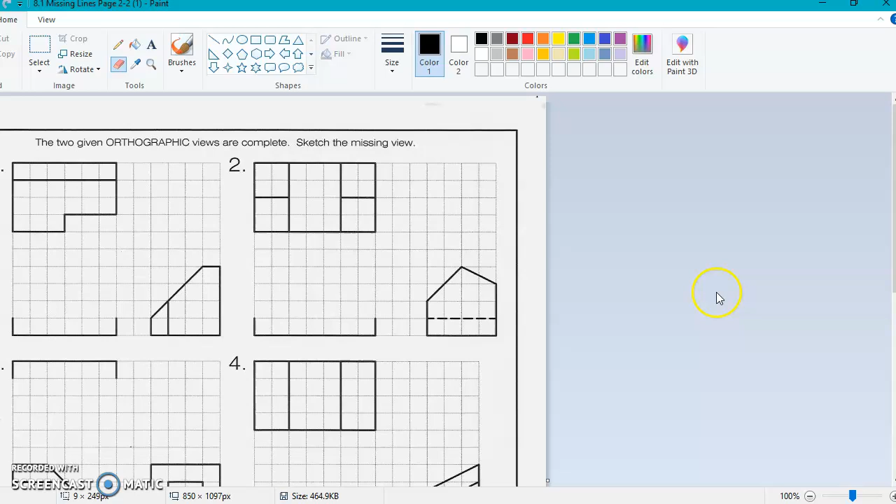And we can see, we'll read the directions for this. This is ORT, orthographic number 7. And it shows 1, 2, 3, 4, 5, 6 items that are orthographics, but they're missing lines. I've imported this into Microsoft Paint, but you can do this with a pencil.

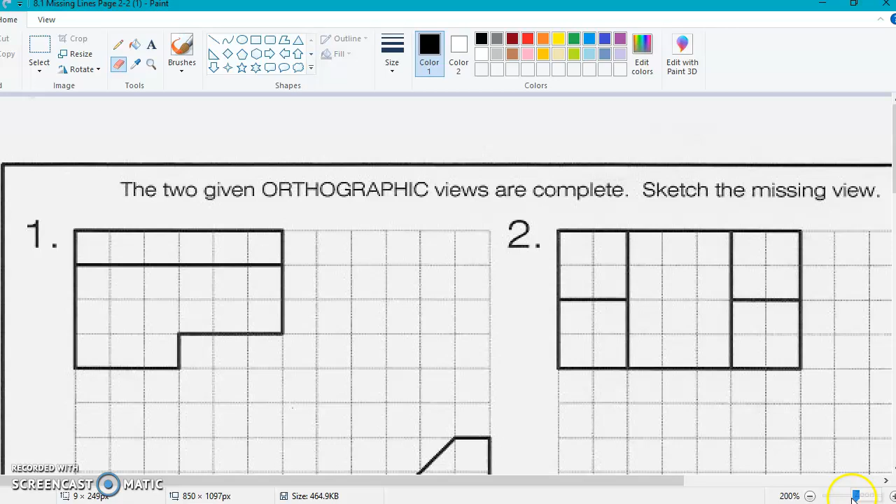The first thing I like to do, we'll just go ahead and tackle one of the first ones and zoom in a little bit. A little bit less than that. There we go. Okay, so we have the object top, front, and side view. And we see we're missing a chunk out of here, and we don't know if there's anything missing. We're going to assume that these two are complete. So we need to make this missing view.

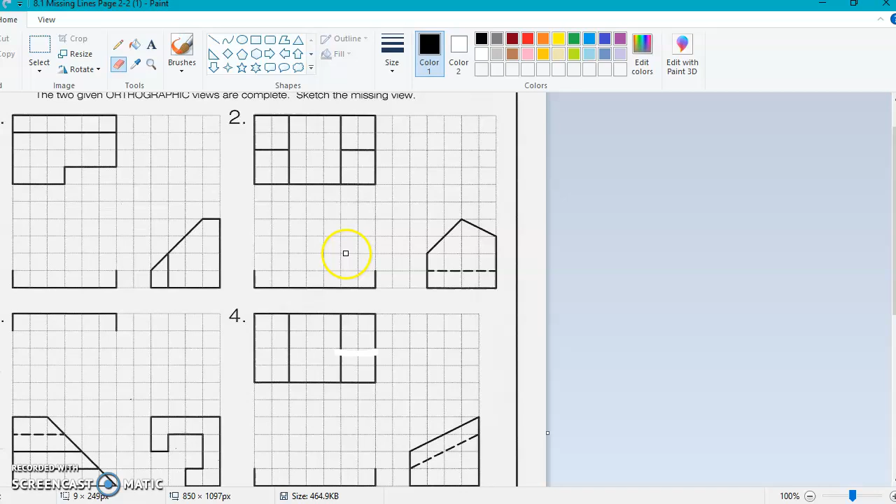What I like to do is use a colored pencil and take blue for this one. What you're going to want to do is block off all the vertices till you start making an object with this. So I'm going to bring one here from this vertex. I point one of the corner points, and then here's another one. First, I'll consider trying to create a frame. So this came off the top. There's something happening here, but I'll do the boundary sections first.

Boundaries complete. Bring one off of there. Draw a line. And you can see I'm kind of going past the object because this is in a sense a construction line. Okay, so you can start to see the shape has formed. Because it looks like it on the top goes all the way to the top frame on this, and this goes to the bottom, I can safely say that I can probably draw in the boundary. It's not going to be any bigger or any smaller than the other two drawings. So it's going to be covered here.

And we'll go back to our painting, get some more shapes. Let's see. Now, this solid line, we can be pretty guaranteed that it is continuous, but on the top view it does do a jog. So we need to figure out if the jog is going to cause any change in direction. So let's take our blue line and see what happens here if we take this line, bring this line down. Okay, and now I can start drawing this without thinking too much. Don't think too much about it. Just kind of cast the line and see what you can make, because these are giving you some guides as to what's happening.

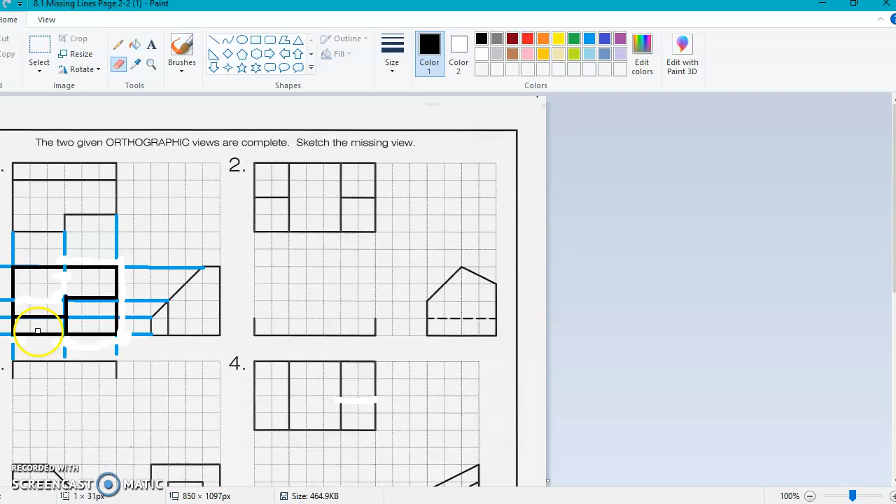And now I'll double check. This is to the top. This is an incline. If I wanted to put an arrow in there, I could do that. But since I have all three views to help me understand, I'll let it go at that.

Let's try another one. These should be ordered so that you can start to build your accuracy at it. So I'm just casting lines from the vertices. Try to understand where they are. How high is it? It's going to go off of this. Will be as far as I can go. So let's cast a line off of it. And then there's this one, but we'll hold off on this. We'll go ahead and create the boundary shape.

Erase what I've done. And unfortunately, I can't just pick the line. I have to do this. Okay, and then next line that should be done, we'll start using our counting of the grid to help us out. So that's 2 over and 2 over, and it lines up with this. So I'm going to make the idea that it comes from here and it goes over 2. Stabilize. This is coming straight down.

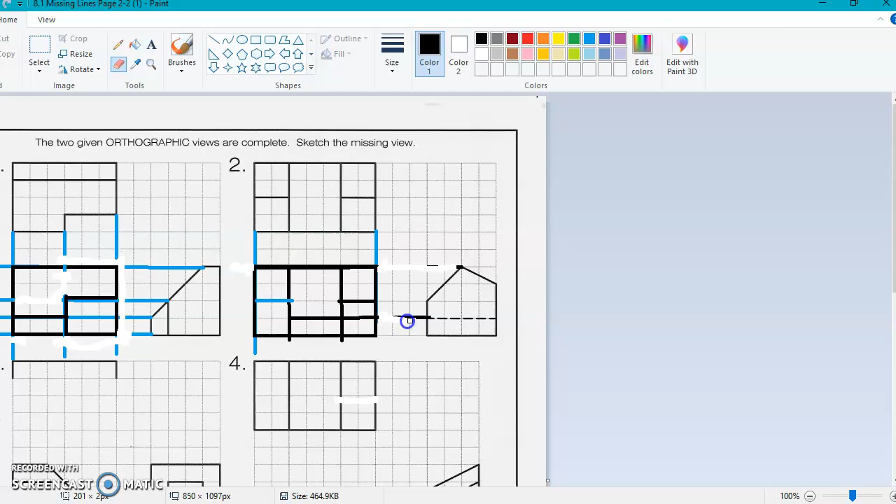Okay, check our time. We're good.

Okay, so extending these lines helps you, especially when you have a complicated piece like this. I wanted to let you know what happens on a curve. Although you see the curve here and you see the curve here, you won't see it in the other views because you're looking straight down on something. You're looking at this. It only appears curved in the front view, and in this one it only appears curved from the top view. And this is typical for some of these rounds.

So let's go ahead and sketch a few things and see if we can fill out this form. So it looks like we're going to be fixing the top view. Let's fix the top view. Okay, and then we can count the grid. 1, 2, 3, 4. So we're going to come down 4. And this time I'm pretty sure that I have 1, 2, 3, 4. This is going to be the cube that's created. Square. Rectangle, rather.

Okay, so let's get rid of this. I don't think I like that. It's interfering with my thinking. Okay, so we're going to take this and we're going to create the boundary that we said was 4. And there it is. We'll accept it. And now it's 4 here, 4 here. We know that it splits in the middle, but it splits in the middle at a very awkward point. So this is on the curve where it splits. I don't want that. So let's go back.

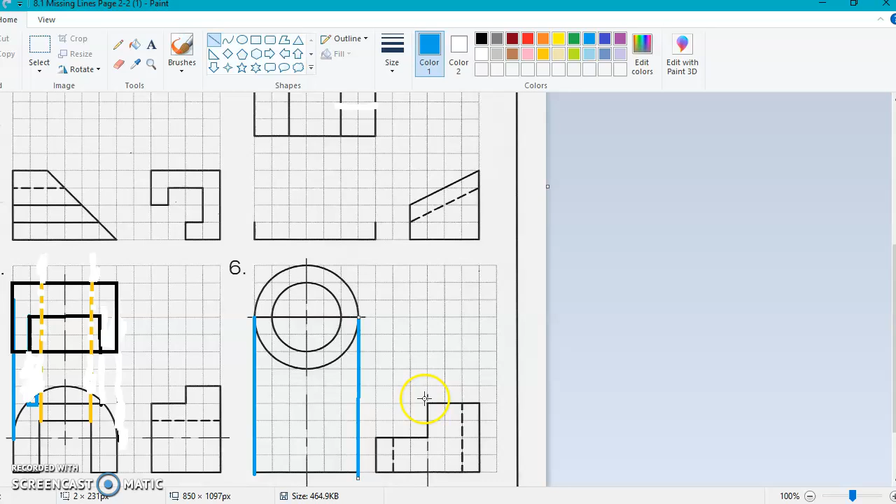I'm just going to show you that this circle is going to end up very flat. And we find out by casting a line from the farthest point, also known as the tangent or the vertex, one there, one line coming down here. Can't be any higher than this, at least for that background. And this looks like a ledge. But we will see all of this part, so we're going to put in our outline of it. So now, instead of a circle, the cylinder, we're seeing it very flat. So we'll accept that. And the ledge goes all the way back. I can see through there, so I think we're good there.

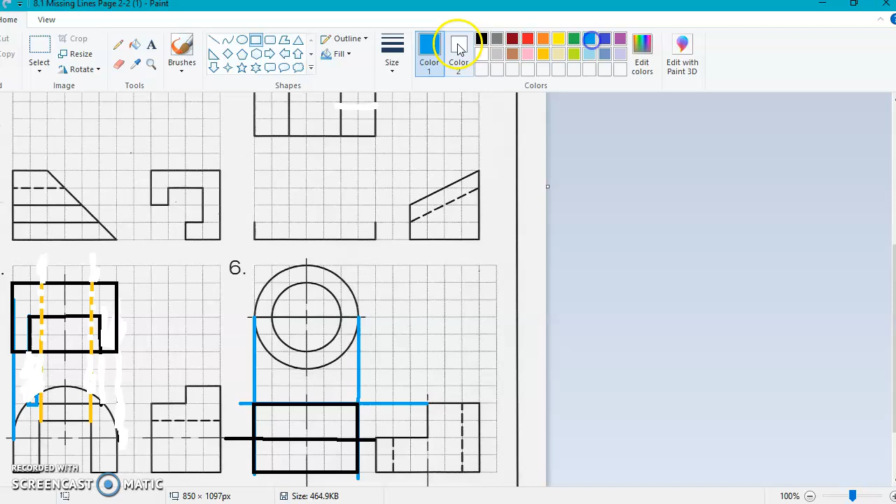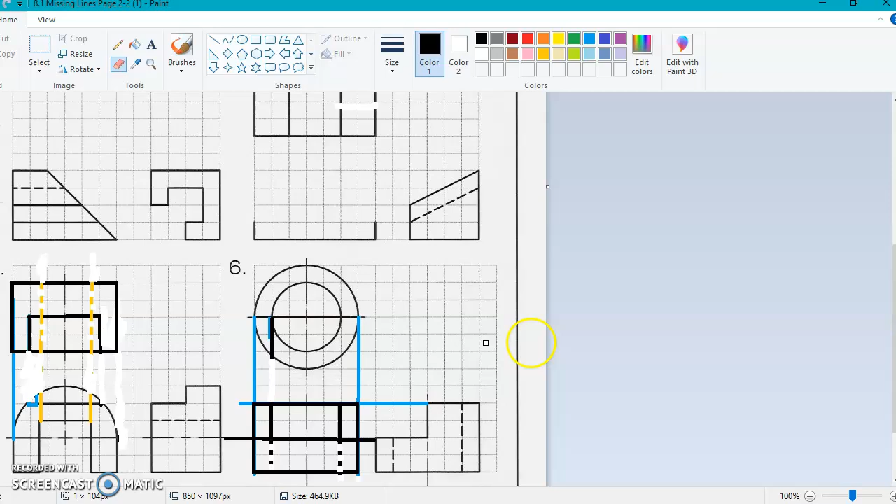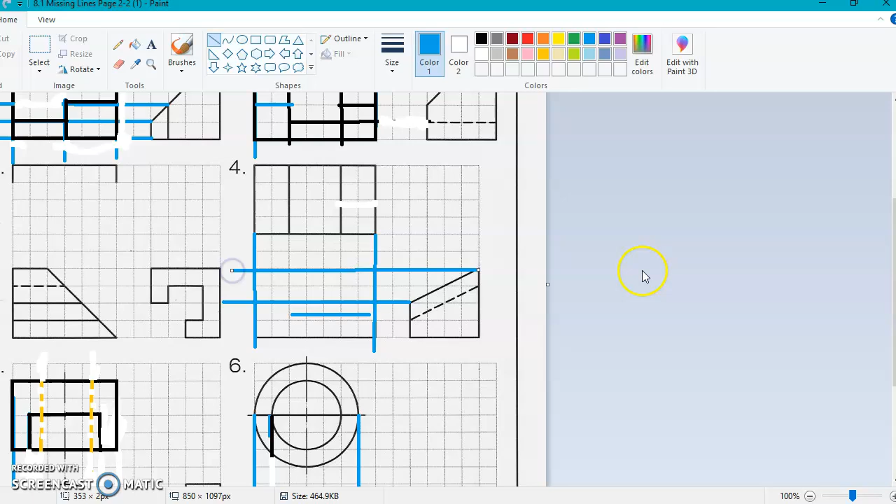There. I hope this has helped you to understand how you can finish out these missing line problems by casting lines. Don't think too hard about it. Just use your lines. See where the vertex is going to end up. Make yourself a framework. Not like that, but like this. Make a framework. Send those lines until you start to carve out a shape that you can start to identify. So the drawings given help you to determine the other shapes, and with that you start sending out lines so that you too can get a better understanding and start to carve out these shapes.